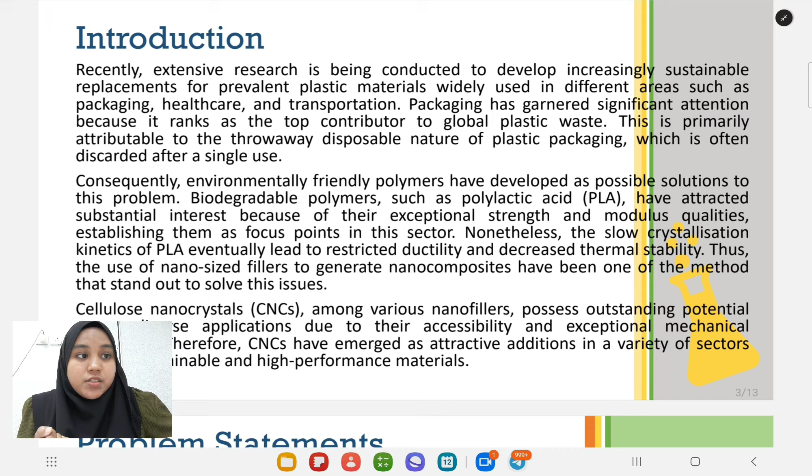However, the slow crystallization kinetics of PLA eventually lead to restricted ductility and decreased thermal stability. And thus, the use of nano-sized fillers to generate nanocomposites has been one of the methods that stand out to solve this issue. So, cellulose nanocrystals among the various nanofillers possess outstanding potential for this application due to their accessibility and exceptional mechanical properties. And also the cellulose nanocrystal is a biodegradable polymer, which is also an environmentally friendly filler. So therefore, the CNCs have emerged as attractive additions in various sectors for sustainable and high performance materials.

Next is the problem statement. So the first problem statement is the use of conventional acids such as hydrochloric acid and sulfuric acid in CNC production is giving adverse effects on the environment and also poses hazards to health and safety. So in order to solve this issue, in my research I will use the deep eutectic solvent (DES), which is low toxicity and safer compared to those conventional acids.

And the second problem statement is the aggregation issues of CNC in PLA matrix due to poor compatibility between the two materials. So in this research, I will do modification on the CNC in order to increase the hydrophobicity so that the compatibility between the two materials will increase.

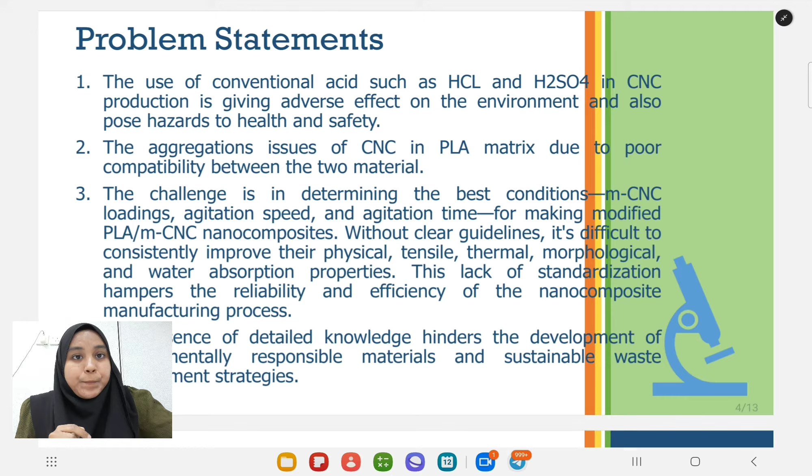The third problem statement is the challenge in determining the best condition for modified CNC loading, agitation speed, agitation time for making the nanocomposite of PLA and modified CNC, because without clear guidelines it's very difficult to consistently improve their physical, tensile, thermal, morphological, and water absorption properties. So this lack of standardization hampers the reliability and efficiency of the nanocomposite manufacturing process. So in this research I will alter and optimize those parameters and find the most optimum one for the fabrication of this PLA and CNC.

And the fourth problem statement is the absence of detailed knowledge hinders the development of environmentally responsible materials and sustainable waste management strategies. So in this research I will do the biodegradability testing in natural weathering and also soil burial.

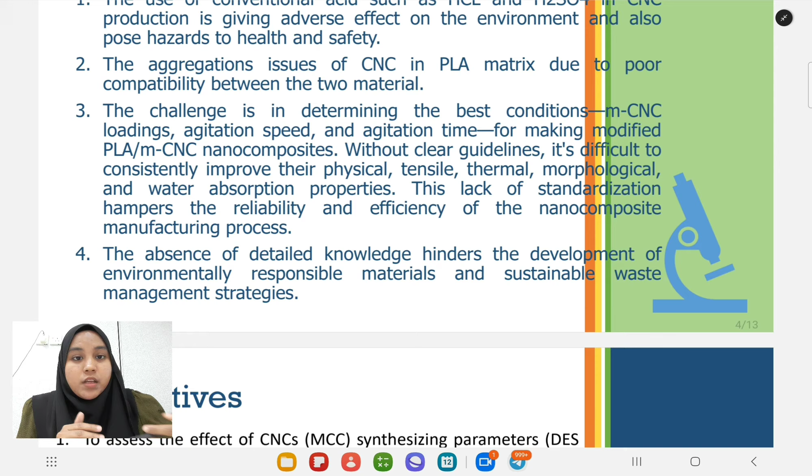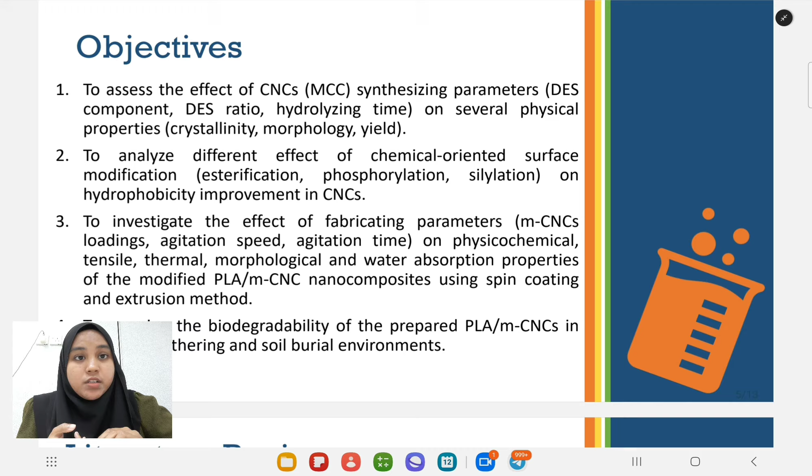So the objective for this research is first to assess the effect of CNC synthesizing parameters, which is the DES component, DES ratio, and hydrolyzing time, on several physical properties, which is the crystallinity, the morphology, and yield. Second objective is to analyze different effects of chemical oriented surface modification, which I will do three different types of chemical modification, which is the esterification, phosphorylation, and silylation, on the hydrophobicity improvement in CNCs.

And third objective is to investigate the effect of fabricating parameters on physicochemical, tensile, thermal, morphological, and water absorption properties of the modified PLA and CNC nanocomposites using spin coating and extrusion method. And the last objective is to examine the biodegradability of the prepared PLA CNCs in natural weathering and soil burial environments.

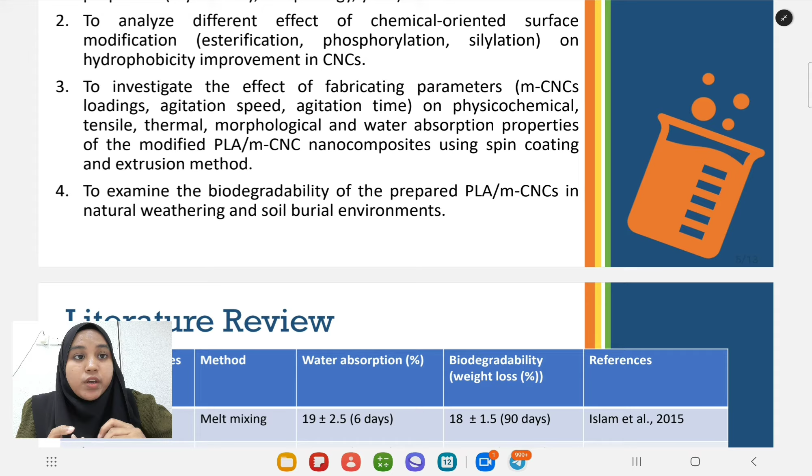So here's a literature review about the previous study on biodegradable nanocomposites. Most of them use the same method, which is melt mixing, because melt mixing is the easiest and fast method. And here I only focus on a few of the properties that I will study, but of course there are a lot of other properties that I will study in mechanical, physical, and also morphology.

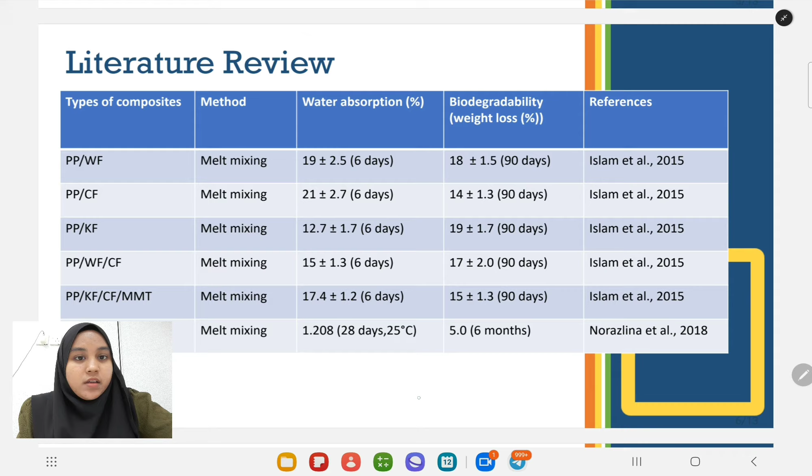So for methodology in my research, we'll start with objective 1, to prepare and optimize the CNC using the DES. So it will be a different combination of DES, different ratio of DES, and different hydrolyzing time, in order to find one most optimum deep eutectic solvent. And then I will proceed with the best DES for objective 2, which is the synthesis of modified CNC by analyzing the different effect of modification on hydrophobicity in CNC.

So here also I will use the different types of chemical surface modification, which is the phosphorylation, esterification, and silylation, and I will compare between the three methods to find the best one, and then I will characterize the modified CNC to determine the presence of the new group in CNCs, which confirms the successful modification method.

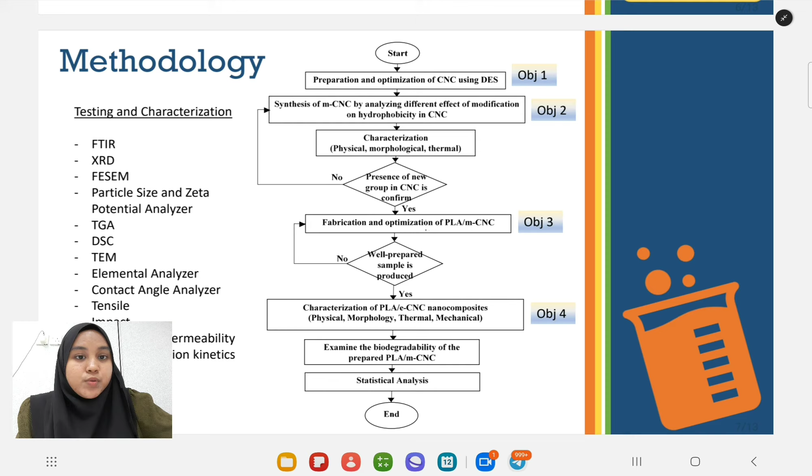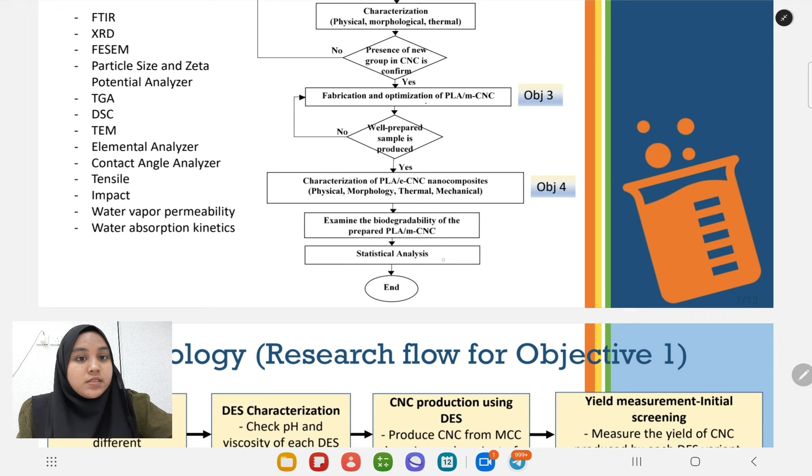After it is confirmed, I will go through to fabricate and optimize the PLA and modified CNC nanocomposite using spin coating method prior to the extrusion method or melt mixing, until the well-prepared sample is produced. After that, we'll go for characterization of the sample in physical, morphological, thermal, and mechanical, and then I will examine the biodegradability of the sample, and lastly the statistical analysis. So here is the testing and characterization that I will go through during my research.

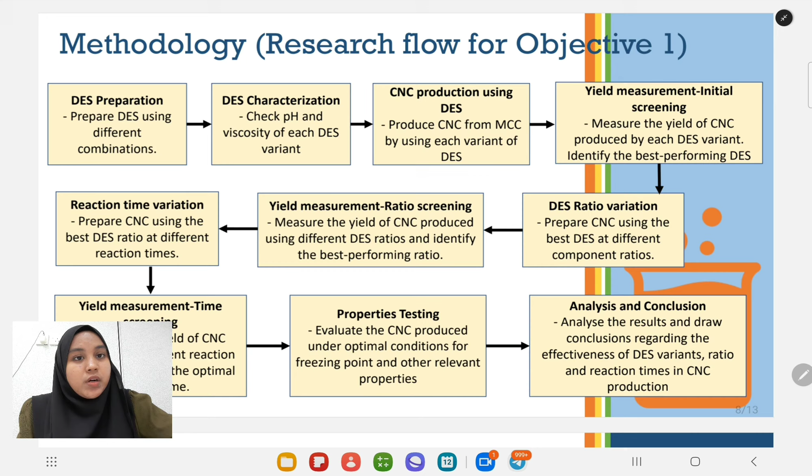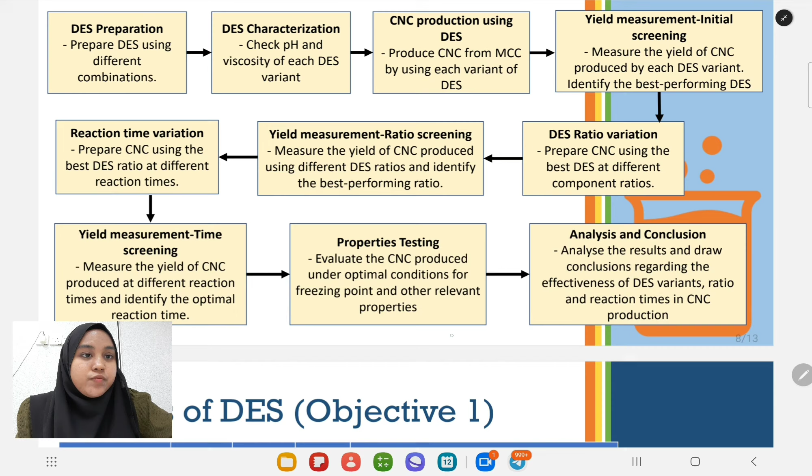Here is the methodology, which only focuses on objective 1, which I'm doing right now. The flow starts with the DES preparation in terms of different combinations, and then I will screen it to find only one best DES combination, to proceed with different ratios. And then from the different ratios, I will only choose the best one ratio to proceed with the variation in time screening to find the most optimum time for CNC production, and then I will go for properties testing and analysis and conclusion.

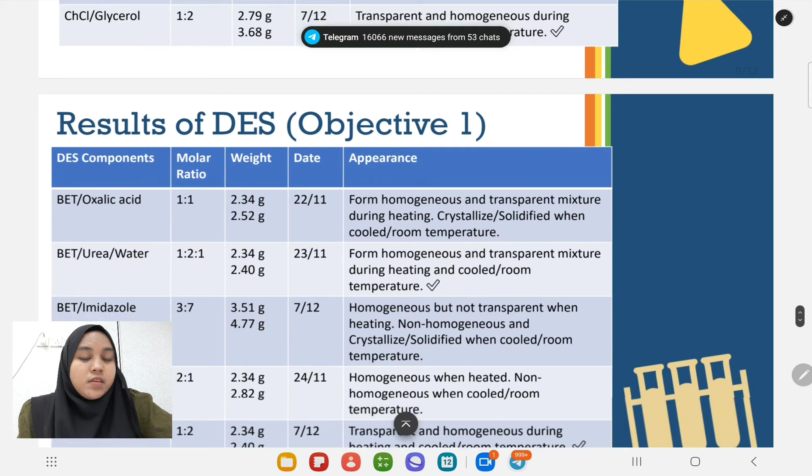So far here is the preliminary result that I get. This one is the different DES components. Here is the choline chloride based DES. Here is only the appearance of the DES, where the good or successful DES is the one which formed a homogeneous and transparent mixture and is also stable at room temperature. And here is the betaine based DES. Here is the picture of my sample.

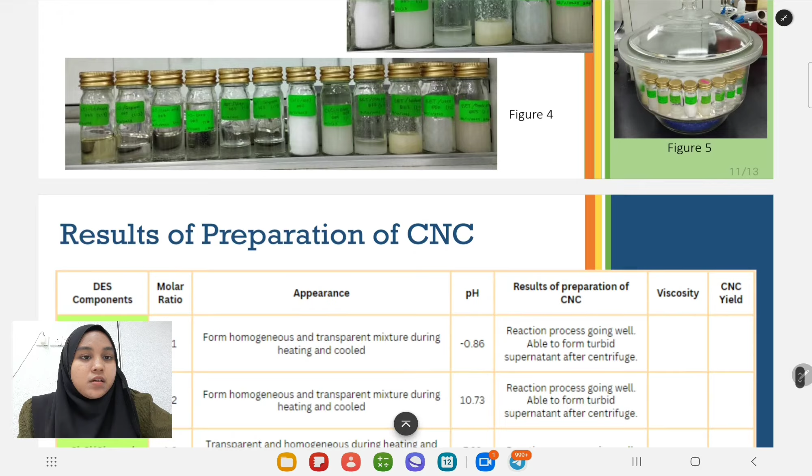Next is the result of preparation of CNC. Here, in this result, I already mixed it in order to investigate how the DES can be mixed with the MCC to get the CNC. So based on the observation, not all DES can mix with the MCC, only certain ones. So only these 5 DES can be mixed with MCC, and we'll proceed for the next step or the next subsequent method.